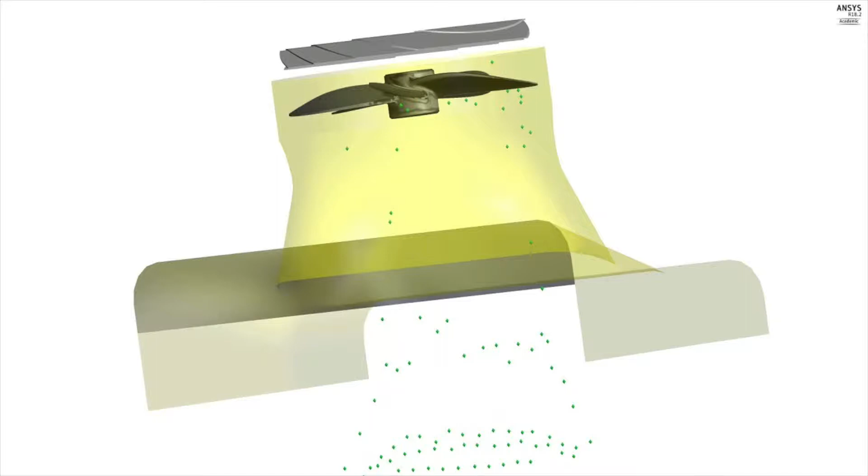The Lygus bug is a pest that eats the seeds on the strawberries, which causes deformation, resulting in $100 to $200 million worth of damage every year. The Lygus bug vacuum consists of a hydraulic motor attached to a fan that is housed inside the ducting unit and is attached to the front of a tractor.

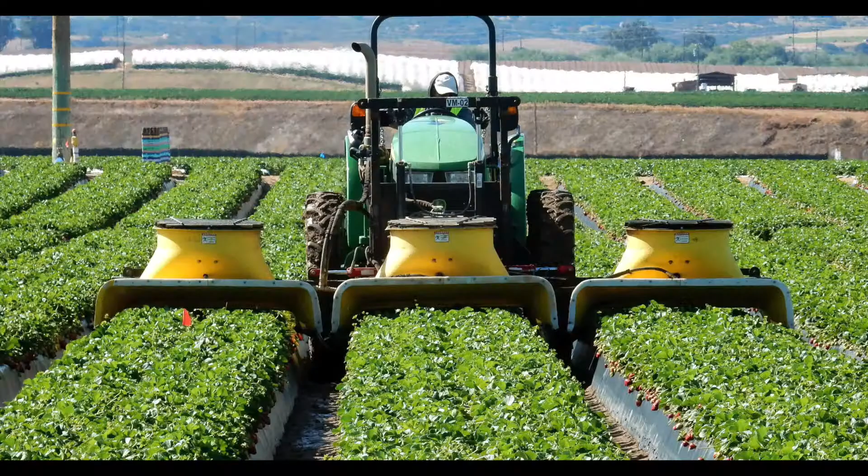A grate is attached to the top of the ducting unit, which the bugs hit at a high speed and are killed. As the tractor drives over the strawberry field, the vacuum creates a suction force that sucks up the Lygus bug. This is the current design that the California Strawberry Commission designed and uses. There are several different designs, all homemade due to the lack of commercialization.

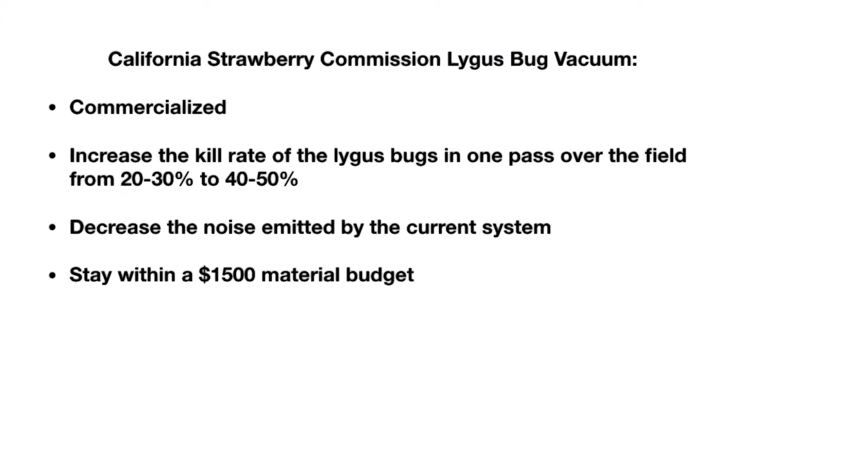The California Strawberry Commission was requiring our group to design a Lygus bug vacuum that can be commercialized, increase the kill rate of Lygus bugs in one pass over the field from 20 to 30% to 40 to 50%, decrease the noise emitted by the current system, and stay within a $1,500 material budget.

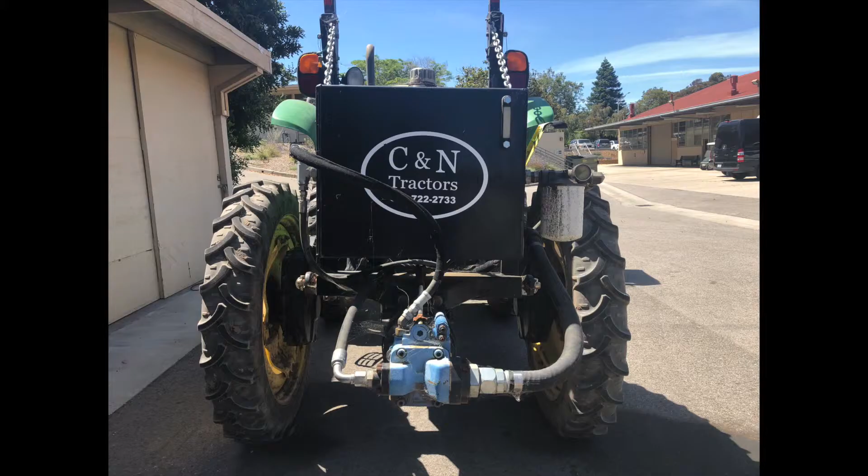Our design constraints were that the system has to cover the typical 48-inch strawberry bed, it must fit on the front of a tractor, the tractor power is limited to 110 to 120 horsepower through the PTO, it must be lightweight in design in order to reduce compaction and increase mobility, and it must be aesthetically appealing.

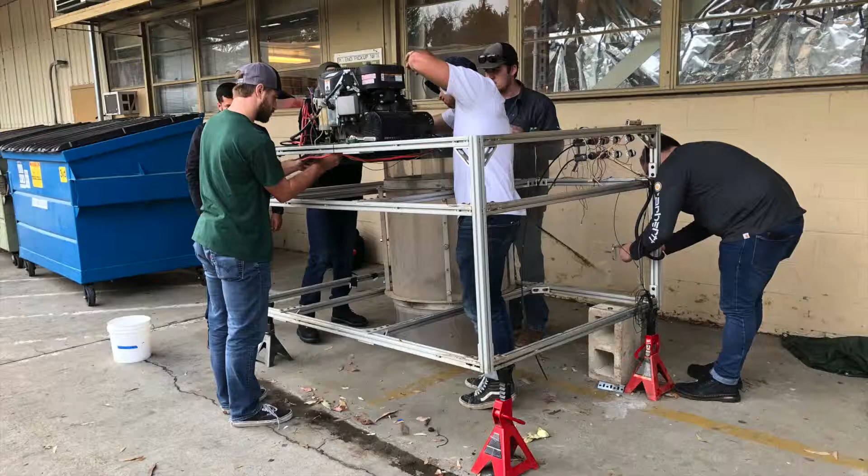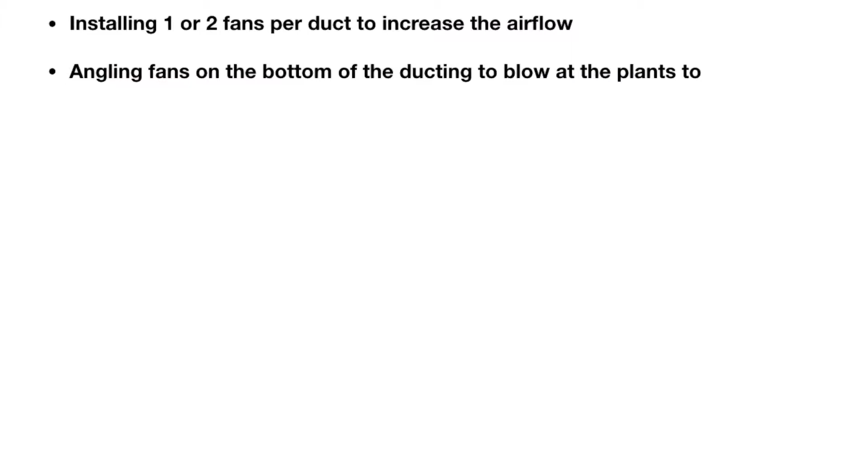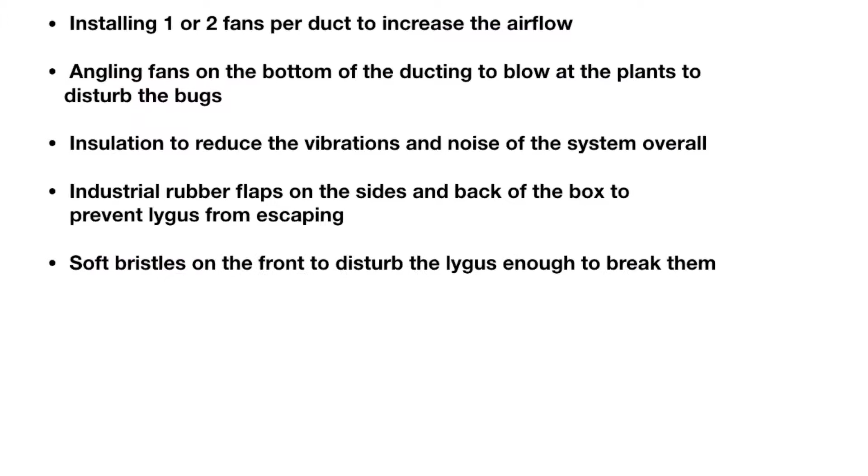Some other considerations that we determined might be helpful for improving the design were installing 1 or 2 fans per duct to increase the airflow, angling fans on the bottom of the ducting to blow at the plants to disturb the bugs, insulation to reduce the vibrations and noise of the system overall, industrial rubber flaps on the sides and the back of the box to prevent Lygus from escaping, and soft bristles on the front to disturb the Lygus enough to break them free of the strawberries but not harm the plants or spread diseases.

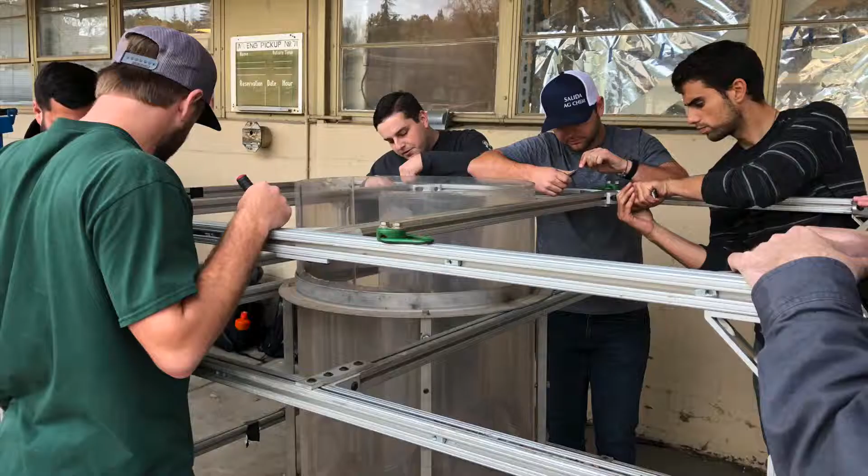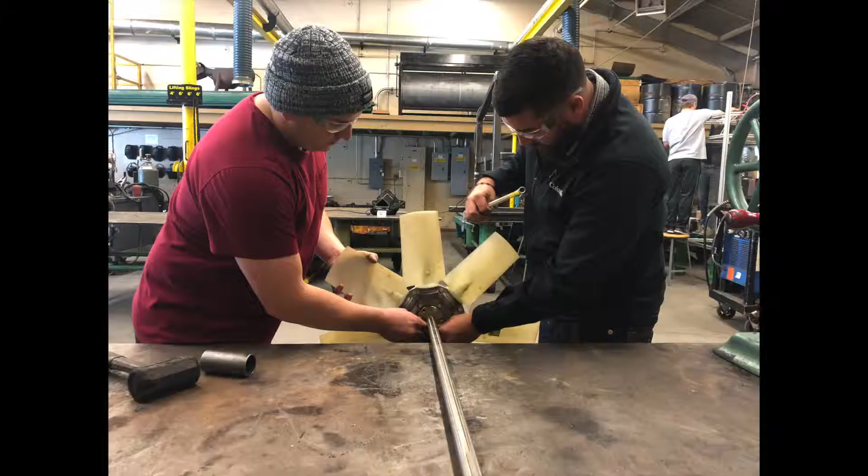The testing unit was built from disassembling the initial prototype. The goal of making this was to be able to swap out the ducting size and test the effect of the gap between the end of the fan and the duct on the airflow. This was the most important principle in designing the ducting, so it was justified that we spent the first 3 weeks making this unit. We also wanted it to be tall in order to test how the distance away from the inlet of the ducting affected the wind speed.

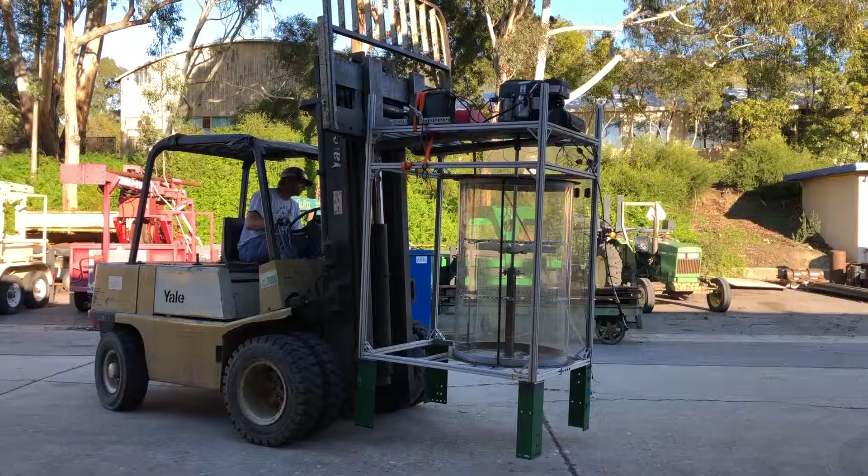The system had to be movable with a forklift to ensure that it could be moved in and out of Shop 6. The wind speed test consisted of testing the effect of wind speed when using different sized ducts. A 24-inch fan was tested with a 26-inch and 30-inch duct.

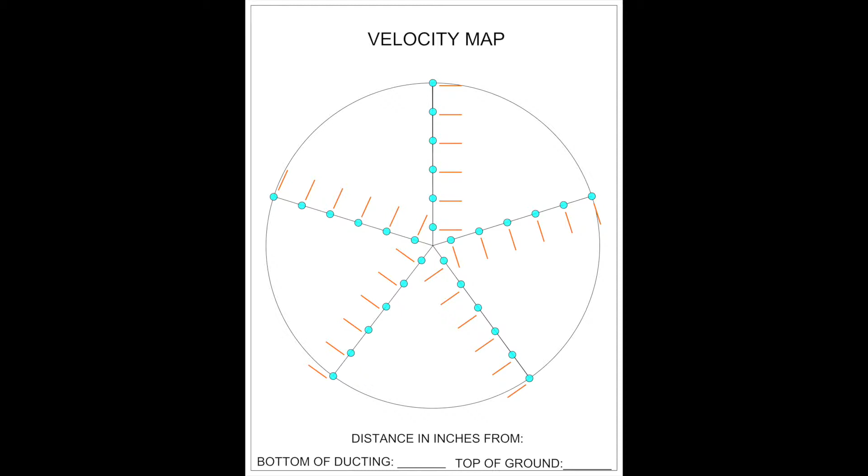We used this velocity map created by the fan optimization team to keep track of the 600 data points. We tested how wind speed changed when moving further from the inlet by taking measurements at the inlet, 3 inches, 6 inches, and 12 inches below the inlet. We ran each test 3 times and used an anemometer to collect the wind data.

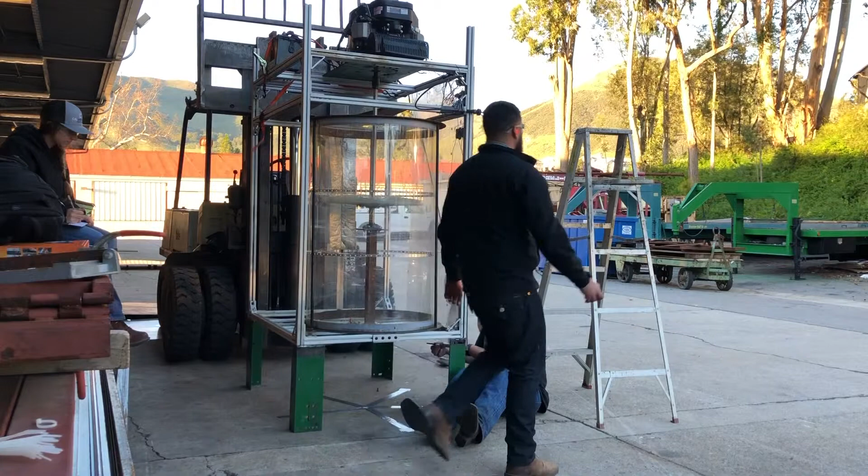From this testing, we learned that the measurements at the inlet towards the edge of the ducting had the highest wind speeds. We also saw a 30% increase in the wind speed from the 30-inch to the 26-inch ducting at the inlet, meaning that the gap between the wingtip and the duct made a big difference, and as a result, we knew that we needed to make the duct only slightly bigger than the fan.

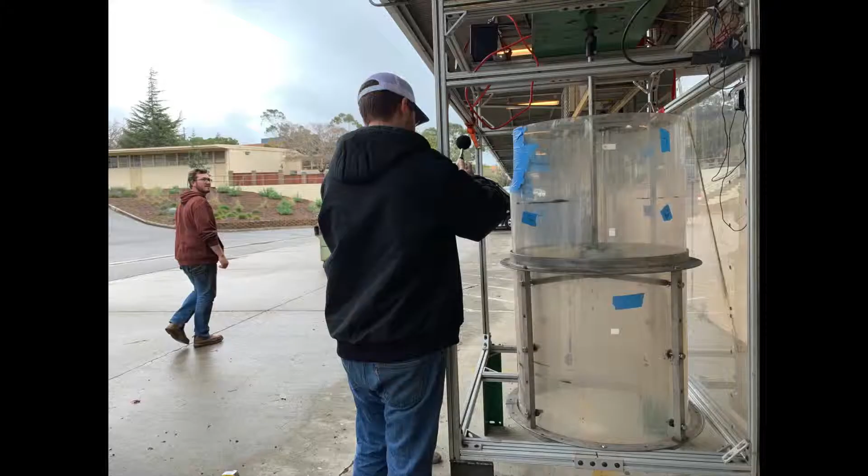The noise test consisted of measuring the noise of the testing unit under 4 conditions: without insulation, with just interior insulation, with just the exterior insulation, and with both the interior and exterior insulations. We collected information on how distance away from the system affected noise. We also measured vibrations with an accelerometer.

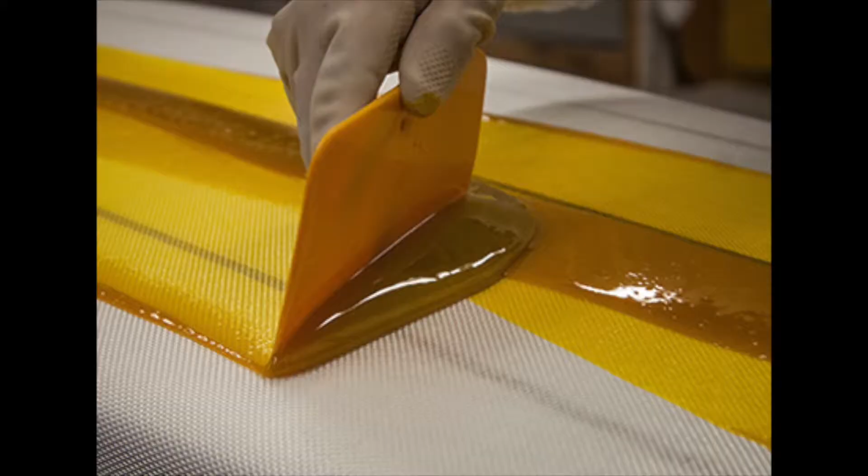From these tests, we learned that there are a lot of vibrations at every location on the ducting, so to prevent this, it would be best to make the ducting out of fiberglass. We also learned that the system is very loud, 110.2 decibels, and we need more ear protection than just earplugs. The noise was about the same, however, regardless of insulation, the further away from the ducting. The best thing to combat the noise for the operator would be to add both insulations on the final product.

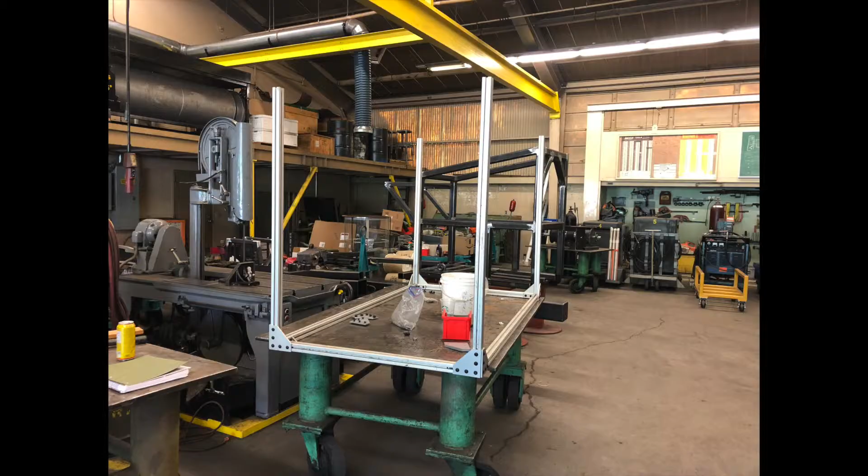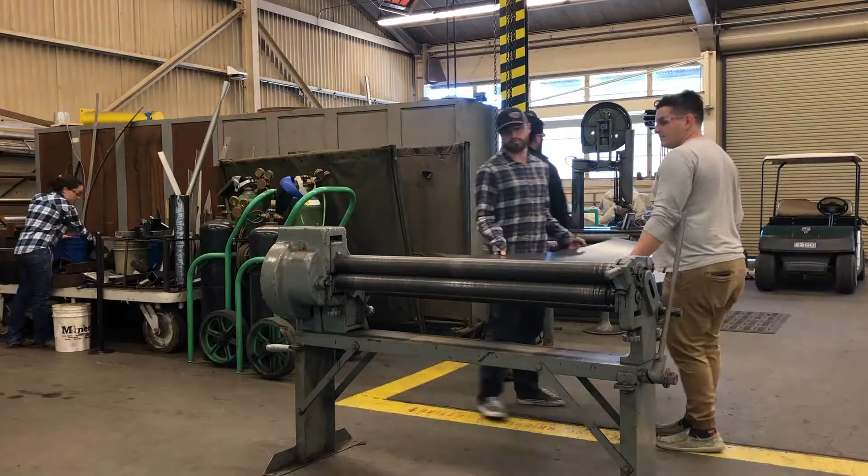To make the frame, we built the 6 foot by 3 foot rectangle out of the aluminum T-slotted framing provided by the California Strawberry Commission to save on costs. To make the ducting, we cut a 4 foot by 8 foot piece of 16 gauge sheet metal into a 30-inch by 61.25-inch rectangle and rolled that into 19.5-inch cylinders. We then MIG welded the sheet metal together and grinded down the welds to have a smooth, clean surface.

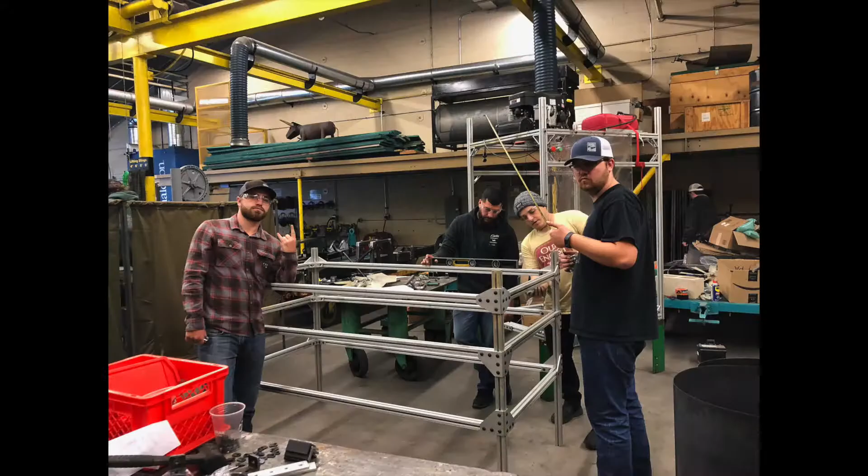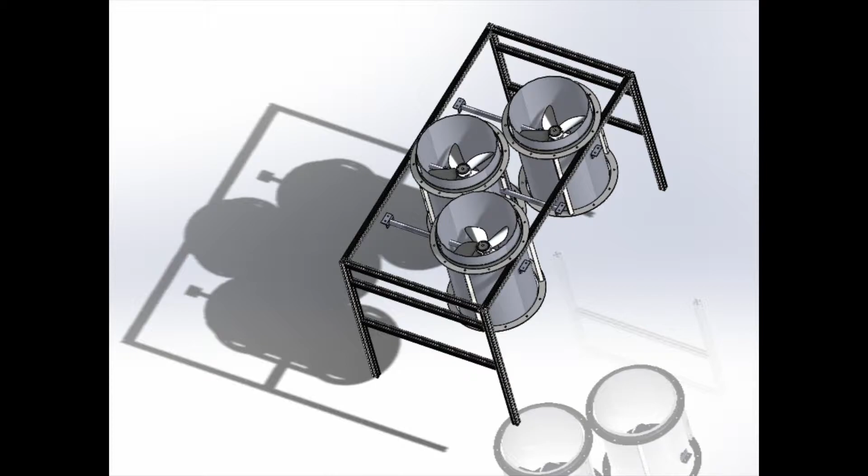We assembled the metal frame for each duct and bolted the ducts to each frame. The ducts were then mounted to the aluminum frame using some custom rods that the fan optimization team made. For the final product, we created 3 cylinders that were 19.5 inches in diameter and mounted them in a triangular shape to cover a standard 48-inch strawberry bed. It was mounted inside the 6 foot by 3 foot aluminum frame. We added additional support beams to prevent the frame from bending and cut holes in the ducting for the fan mounts and hydraulic lines.

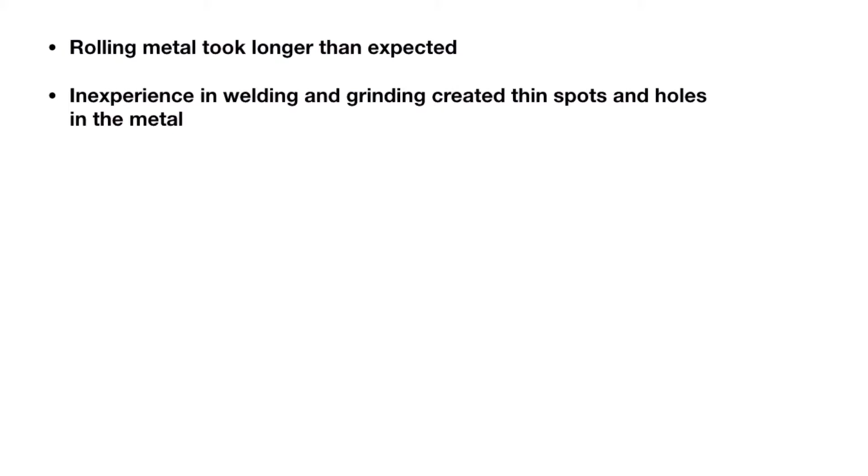Some things that we learned while making this final product was that the process of rolling metal took longer than expected. Our inexperience in welding and grinding created thin spots and some holes in the metal. The ducts did not end up being perfectly circular, which made it hard to fit in the fans. And the project was bottlenecked because the process of fabricating each duct took longer than expected.

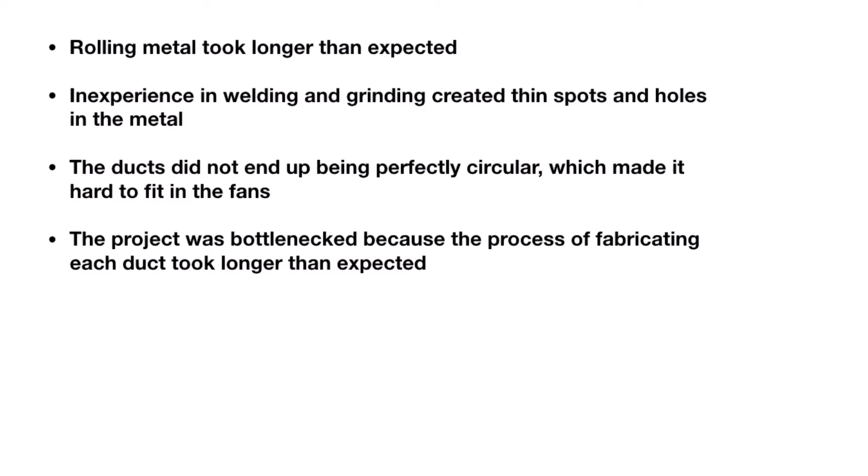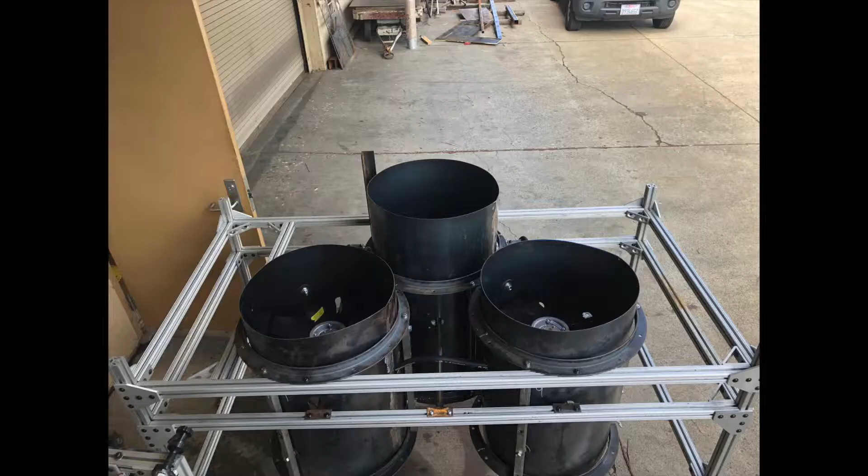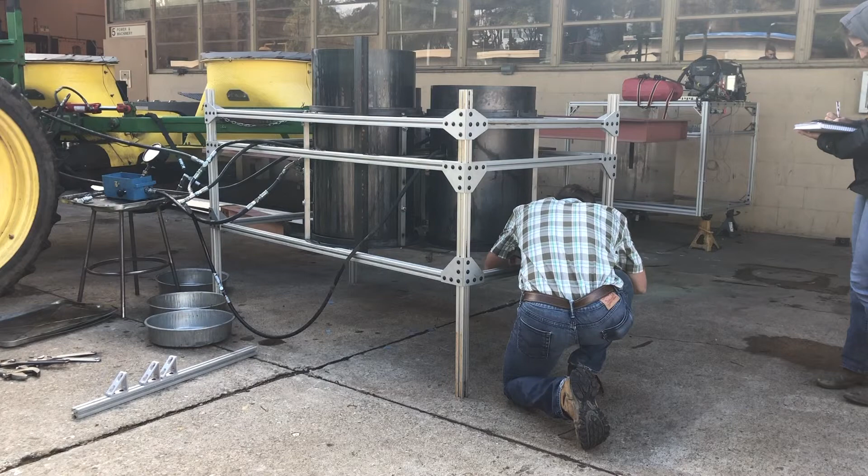Overall, the final project ended up working very well. The California Strawberry Commission was pleased with the research we did and the final product we created. Some things that we learned from this project is to plan on everything taking longer than expected, outsource some of the more challenging tasks, ask for assistance and other references, and constantly confirm data collection and design specs with your sponsor.